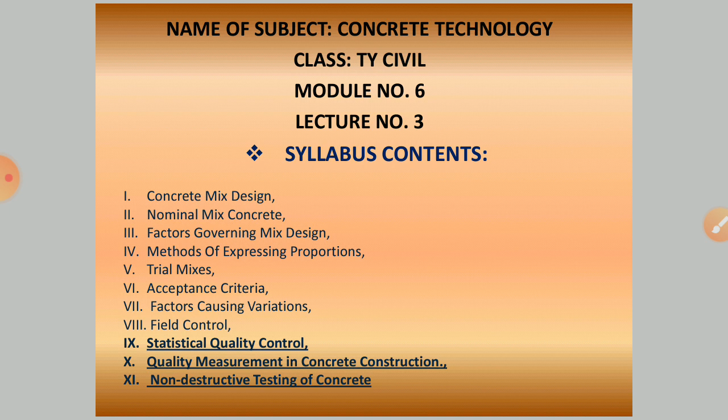First, statistical quality control. See, concrete has a certain amount of variability, meaning variation in both material and construction methods. Means what? Suppose at two different sites, two different persons are going to cast M20 grade of concrete. So there may be variations in strength, okay, because of differences in material and construction methods.

So what should we do? We cannot do a large number of destructive tests. So we have to have some quality control. What is the purpose of quality control? To limit variability as much as practicable. Means the variation should be within a certain limit.

So we use the statistical quality control method, which gives a scientific approach to the designer to understand realistic variability and to lay down the design specifications with proper tolerance and to counteract unavoidable variations. The acceptance criteria in this method are based on statistical evaluation of test samples which are taken at random during work progression.

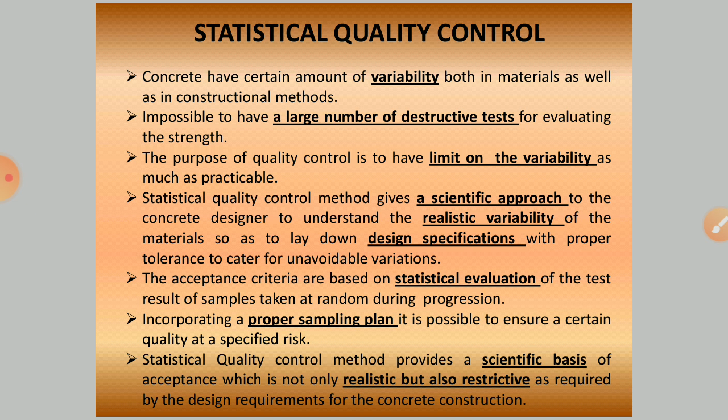So in statistical quality control, there are some common terminologies. We will see them one by one. First one is mean strength. This is the average strength obtained by dividing the sum of strength of all cubes by the number of cubes. Suppose you have cast 3 cubes to check the compressive strength at the age of 28 days. So n will be 3, and the summation of their strengths is written as summation x.

Next is variance. This is the measure of variability or difference between any single observed data and the mean strength. Suppose we have taken 3 test results at 28 days of age of concrete specimens of M20 grade. So we get results as 21, 23, 24. So there is a variation between the 3 results and their mean strength. Suppose we add them and divide by 3; the mean strength will vary with respect to each single observed data. That is called variance.

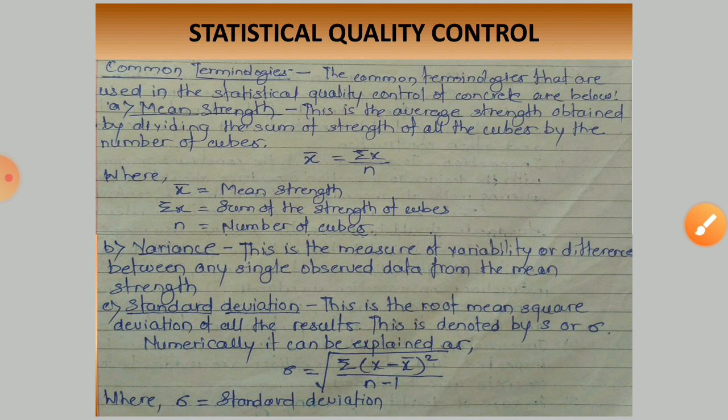Standard deviation is the root mean square deviation of all results. It is given by the formula shown in this slide, sigma. Okay. In this formula, sigma is the standard deviation, n is the number of observations or number of tests, x is the particular value of observation, the reading you have got, and x bar is the arithmetic mean. Standard deviation increases with increase in variability. Means if there is more variation, then there will be an increase in standard deviation.

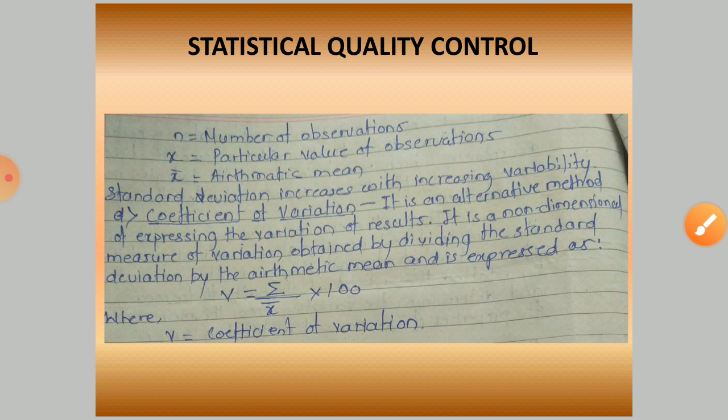Last terminology is coefficient of variation. It is an alternative method of expressing the variation of results. It is a non-dimensional measure of variation obtained by dividing the standard deviation by the arithmetic mean, and is expressed as this equation: V is equal to sigma divided by x bar into 100, where V is the coefficient of variation. Okay, this is about statistical quality control.

Next point is quality measurement in concrete construction. So we can go for inspection and testing of materials. We can record it. We check the record. Then workmanship. Inspection on workmanship: if they are mixing it properly or not, how they are transporting it, what is the time of placing, mixing, etc. And quality of construction is checked by inspection. Means we have to have inspection on material, records, workmanship and construction, meaning they are using proper formwork, doing proper curing, etc.

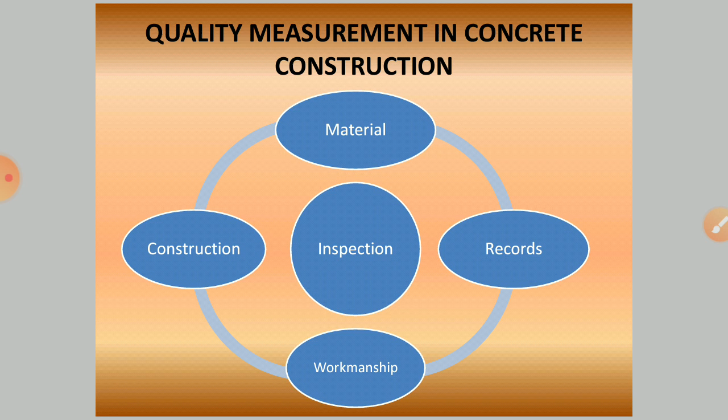Also, quality measurement in construction is very important, and if it is not followed, there will be severe consequences such as not achieving the required compressive strength. Then the structural elements will have deficiency in strength and other factors.

Now there are some non-destructive tests that we can use for concrete. They are called non-destructive testing, NDT. These are very useful and powerful methods for checking existing concrete structures with respect to strength and durability.

Apart from this, in some cases, NDT tests are used for investigation of crack depth and micro cracks. Also, progressive deterioration can be studied by the NDT method. Progressive deterioration means how much your structure has deteriorated since its construction time.

Again, these tests are very simple to perform, but at the same time, their analysis and interpretation of test results are not easy, because you cannot just perform the test and get the result. You will get results in some other form. You have to correlate them with certain equations, certain formulas, certain graphs, and then you will get the strength and durability.

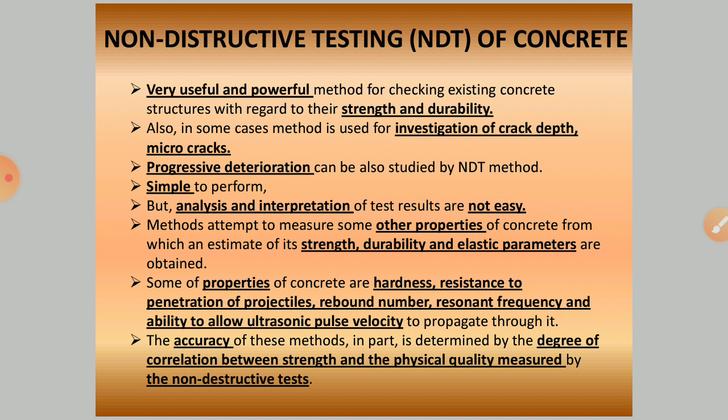By performing these tests to check these properties, we will get some results, and those results we have to correlate with certain graphs and equations, so that we can get strength, durability and elastic parameters. IS code suggests that the accuracy of this method is determined by the degree of correlation between strength and the physical quality measured by these non-destructive tests.

Rebound test, rebound hammer test. Many of you have seen this rebound hammer. The elastic rebound of concrete is the property used in this test, and you get an estimation of concrete strength. There is a graph by which you can get the concrete strength of a particular structure without destroying or disrupting the structure.

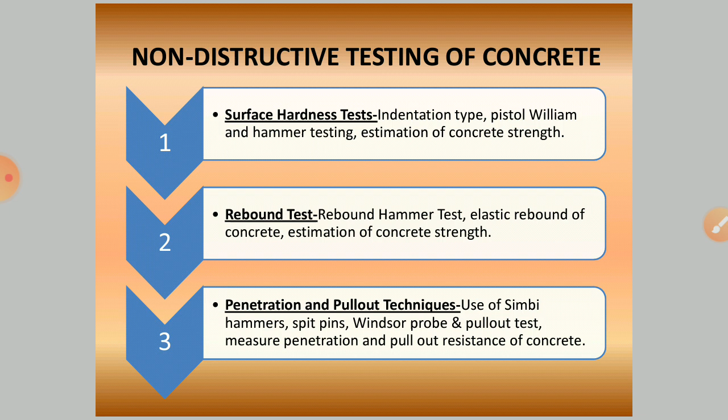Next is penetration and pull-out techniques. These use the Simbi hammer, spit pins, Windsor probe and pull-out test. The penetration and pull-out resistance of concrete is measured, and it is then correlated with the concrete strength. Generally, where you cannot have destructive testing, or if you have to check whether after certain years the concrete has sufficient strength or not, we go for non-destructive testing.

Next is dynamic or vibration test. By using resonant frequency and mechanical sonic and ultrasonic pulse velocity methods, we can evaluate durability and uniformity of concrete, and also estimate the strength and elastic properties. Then there are some combined methods, such as combining ultrasonic pulse velocity and rebound hammer.

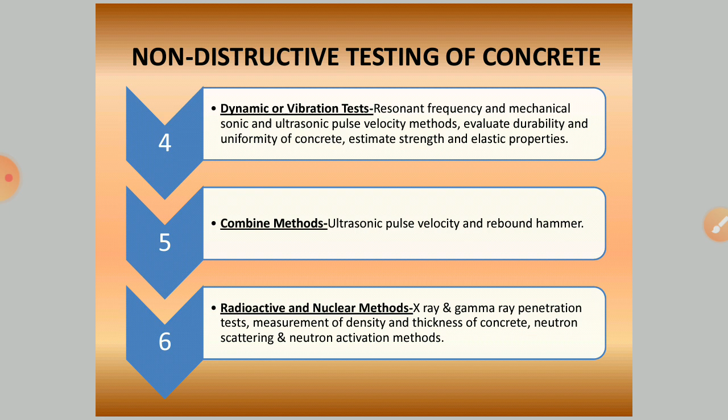Next is radioactive and nuclear methods: X-ray and gamma ray penetration tests. Measurement of density and thickness of concrete can be done using this test. In this test, neutron scattering and neutron activation techniques are used.

Magnetic and electrical methods determine the cover of reinforcement in concrete: how much cover is provided, whether it is sufficient or not. And in electrical methods, the microwave absorption technique is used to measure moisture content and thickness of concrete.

How much moisture is present in the concrete matters, because depending upon the cover of concrete, there is ingress of moisture towards the steel, and you know that for corrosion we require moisture and oxygen. So without destroying a particular beam, slab or column, we can easily check whether the structure has sufficient cover or not.

Next is the acoustic emission technique. This is used to study initiation and growth of cracks in concrete: how the cracks are initiated, what the reasons are, where they are initiated from, and their growth can be checked by this technique.